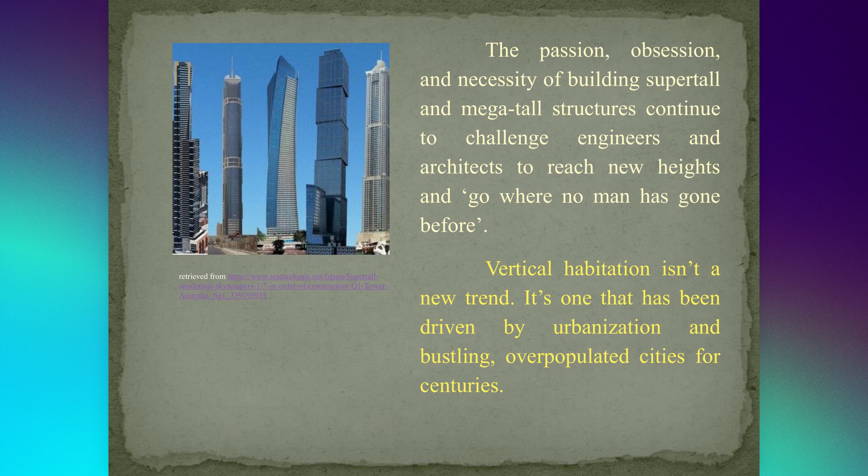Vertical habitation isn't a new trend. It's one that has been driven by urbanization and bustling, overpopulated cities for centuries. While the high-rise buildings that we know today became possible with the inventions of elevators, newer building materials, and structural engineering systems, multi-story construction dates back to the Roman Empire, and vertical cities have been around for centuries. A living example is the 16th-century Yemeni city of Shibam, with mud brick tower houses of 5 to 8 stories high, built to protect the occupants from Bedouin attacks.

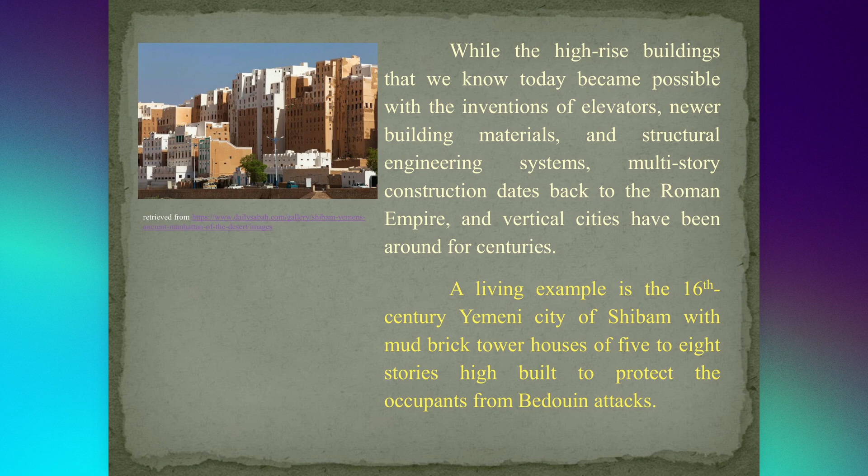Tall buildings are central to the development of future-ready cities. Adding value to the mega-developments of which they are a part, tall buildings have become essential as a means of overcoming the challenges of increasing urbanization and density, combined with the need to enhance livability and sustainability in our urban habitats, particularly in the emerging economies of the world.

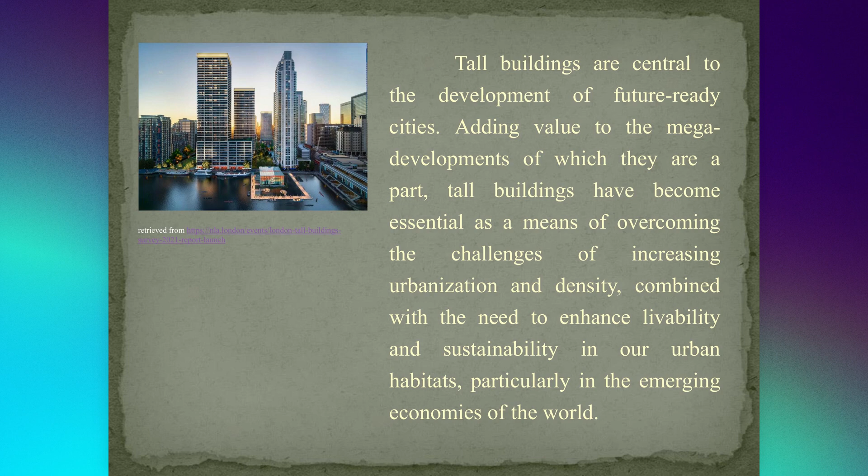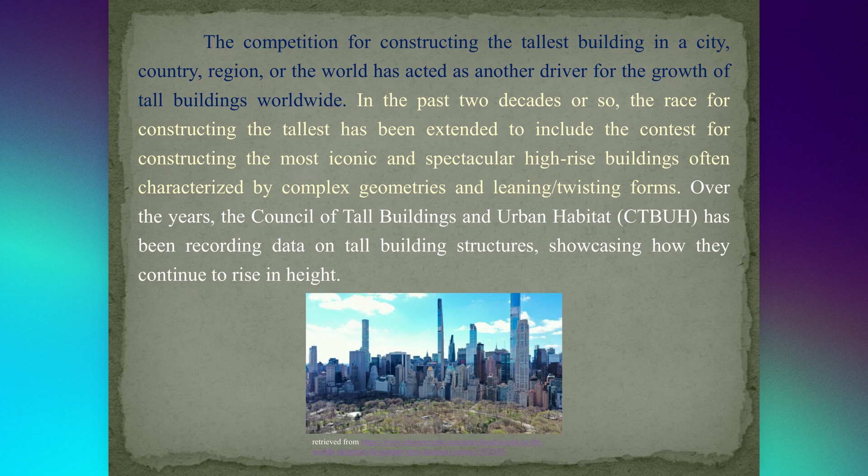The competition for constructing the tallest building in a city, country, region, or the world has acted as another driver for the growth of tall buildings worldwide. In the past 2 decades or so, the race for constructing the tallest has been extended to include the contest for constructing the most iconic and spectacular high-rise buildings, often characterized by complex geometries and leaning, twisting forms. Over the years, the Council on Tall Buildings and Urban Habitat (CTBUH) has been recording data on tall building structures, showcasing how they continue to rise in height.

Today, according to the definition of tall given by CTBUH, a 200 meters plus building is tall, 300 meters plus is super tall, and 600 meters plus is mega tall. However, architectural and structural factors such as the context of the building, its location, and the slenderness of the building, i.e. its height over base ratio, demand more flexible definitions. Skinny skyscrapers, for instance, aren't possible everywhere, and this has more to do with the target market and location than engineering and design capabilities.

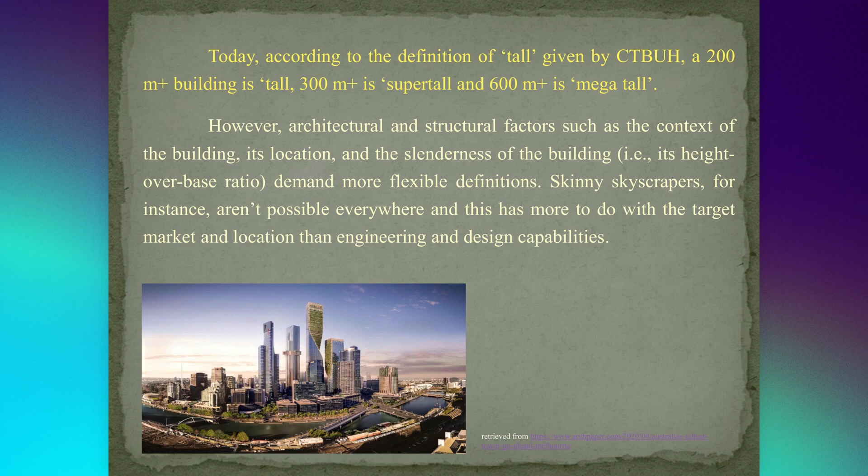An example of this is the super skinny tall buildings in New York City, where each apartment is a penthouse that occupies an entire floor of the building. Engineers consider tall buildings with a height-to-base ratio in excess of 1 to 10 or 1 to 12 to be slender or skinny.

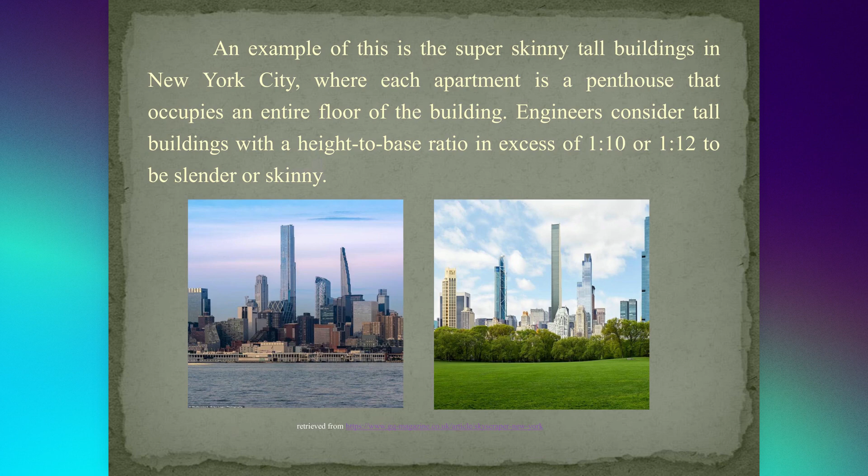The design and the form of original super tall buildings used to be structurally driven, such as the John Hancock Center of 1969, which had exposed structural steel as a part of the design. Today, architects and designers have more form freedom than ever before. Advancement in design and construction techniques allows engineers to assist their architect colleagues to create buildings that would have been unimaginable a few decades ago.

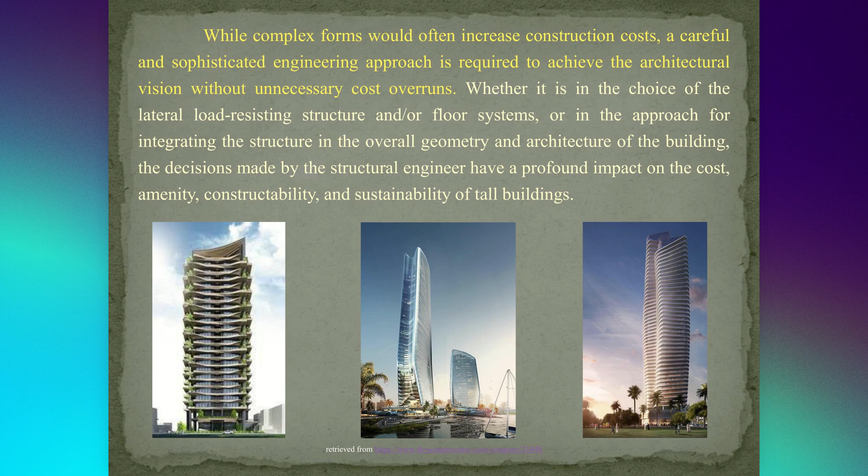While complex forms would often increase construction costs, a careful and sophisticated engineering approach is required to achieve the architectural vision without unnecessary cost overruns. Whether it is in the choice of the lateral load-resisting structure and/or floor systems, or in the approach for integrating the structure in the overall geometry and architecture of the building, the decisions made by the structural engineer have a profound impact on the cost, amenity, constructability, and sustainability of tall buildings.

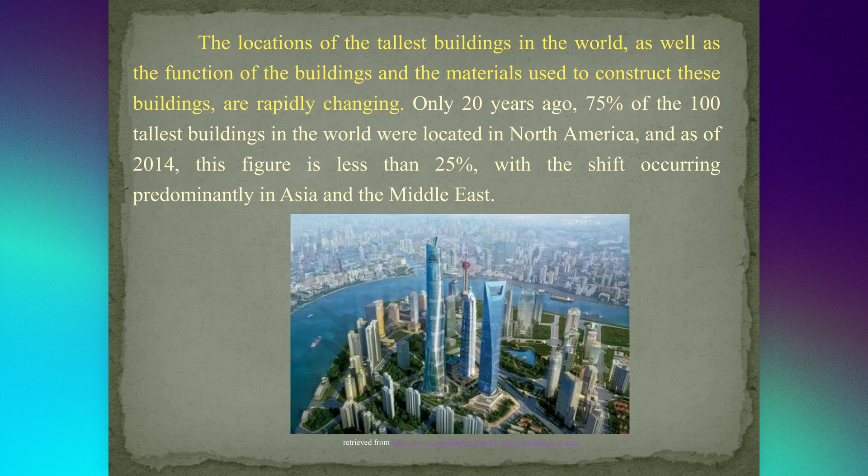The locations of the tallest buildings in the world, as well as the function of the buildings and the materials used to construct these buildings, are rapidly changing. Only 20 years ago, 75% of the 100 tallest buildings in the world were located in North America, and as of 2014, this figure is less than 25%, with the shift occurring predominantly in Asia and the Middle East.

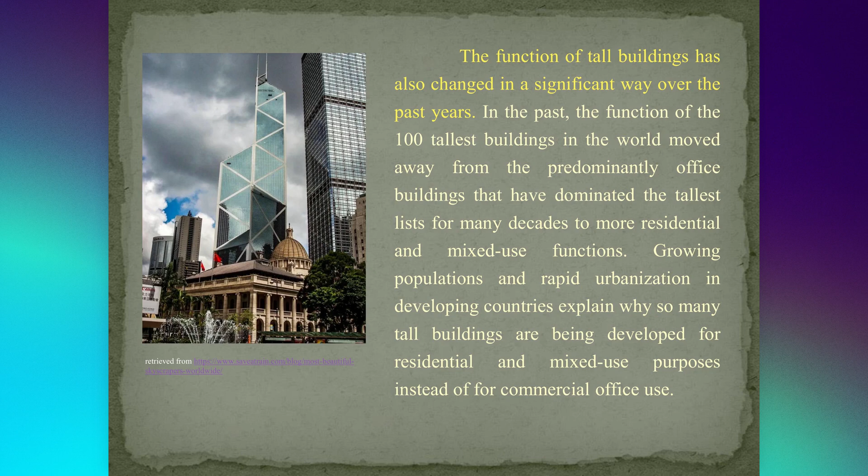The function of tall buildings has also changed in a significant way over the past years. In the past, the function of the 100 tallest buildings in the world moved away from the predominantly office buildings that have dominated the tallest lists for many decades to more residential and mixed-use functions. Growing populations and rapid urbanization in developing countries explain why so many tall buildings are being developed for residential and mixed-use purposes instead of for commercial office use.

The structural materials used in high-rise buildings are typically one or a combination of reinforced or pre-stressed concrete, structural steel, and composite systems. Structural material systems for high-rise buildings should be chosen by carefully considering architectural, economic, and site factors. The economic drivers vary by geography, as the relative costs of material, labor, time, and space vary from one location to another.

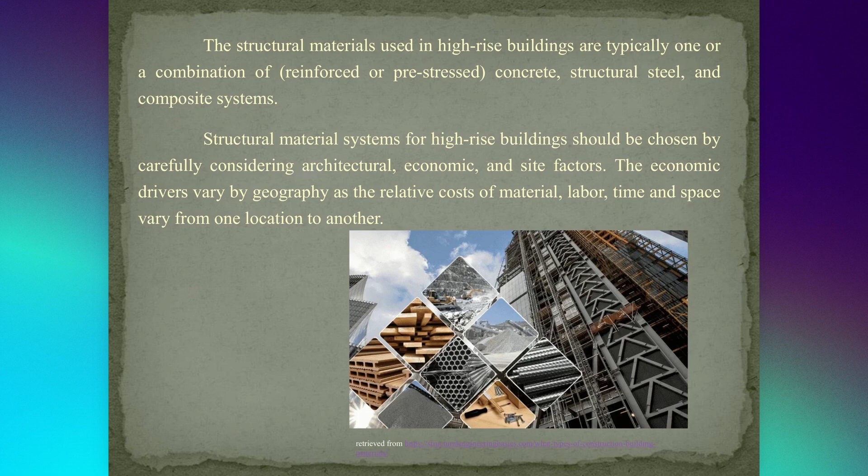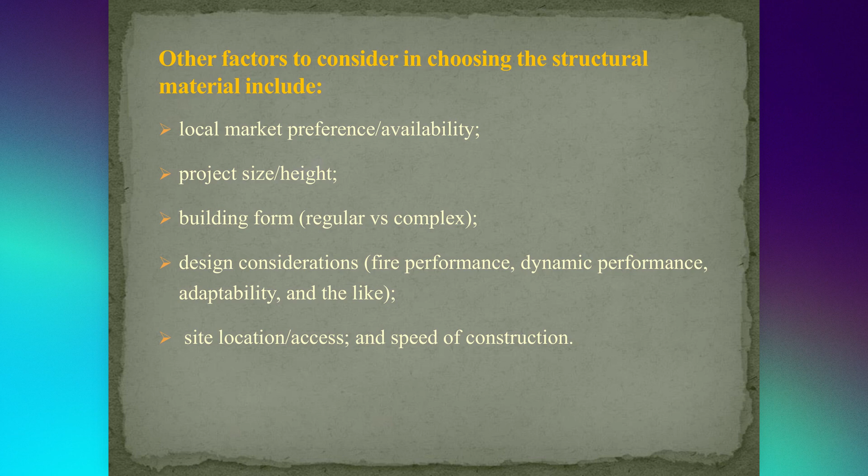Other factors to consider in choosing the structural material include local market preference, availability, project size, height, building form (regular versus complex), design considerations (fire performance, dynamic performance, adaptability, and the like), site location, access, and speed of construction.

Preferences and the economic viability of the different structural materials that are used in tall buildings construction are also changing. In 1970, 90% of the world's 100 tallest buildings were all steel buildings. Today, all steel buildings account for less than 15% in favor of concrete or composite structures. The cost of the material, technological expertise, and the way that tall buildings are being built all influence this change in the material selection of tall buildings.

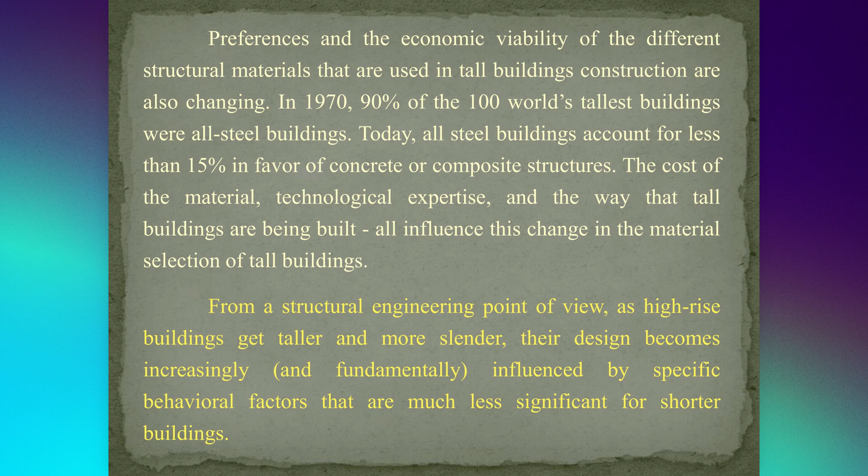From a structural engineering point of view, as high-rise buildings get taller and more slender, their design becomes increasingly and fundamentally influenced by specific behavioral factors that are much less significant for shorter buildings. These factors include the dynamic response of tall buildings to wind loads both in the ultimate and serviceability limit states and the differential axial shortenings of the vertical elements of tall buildings under gravity load effects.

As far as these factors are concerned, the absolute height of the building is not necessarily the best measure for tall behavior. In particular, the magnitude of the dynamic wind response is more significantly influenced by the overall slenderness of the building and the natural frequencies of its fundamental modes, that is, the first two sway modes about the principal axes of the building and its first torsional mode, than its absolute height.